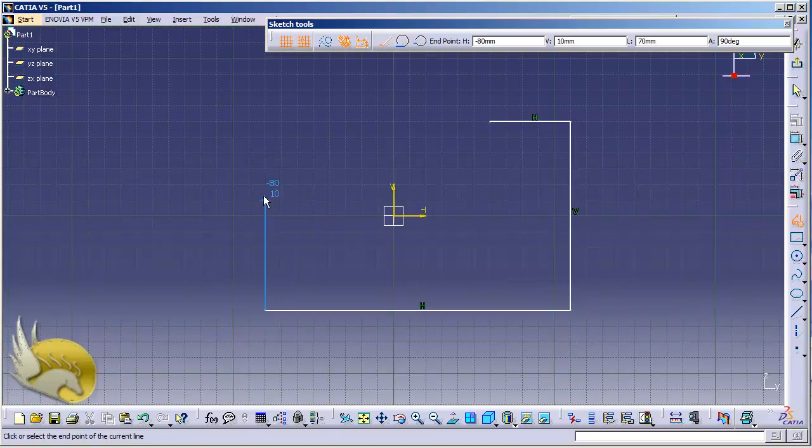I click on the sketch and go to YZ plane, and I select the profile tool to create a U-shaped profile like this. I go down to the left, to the upper, and I'm going to have an arc here. So this is the arc. I go down again to the right and now close my profile like this. So I exit my workbench and now start padding this 20 millimeters in both directions. I guess it is okay.

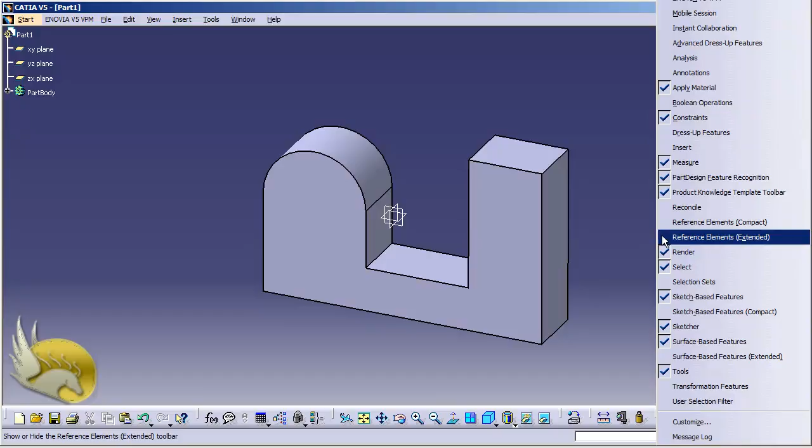So I click here and now I have this plane, this plane, this plane, and a lot of other planes that are available for me to create my sketch. So what if these planes are not enough for my purpose? What if I want another plane here? If you need to create new planes, you need to have the reference elements toolset available in the part design environment. So right click on your toolbar and make sure reference elements extended is selected. So I select this and you can see this here.

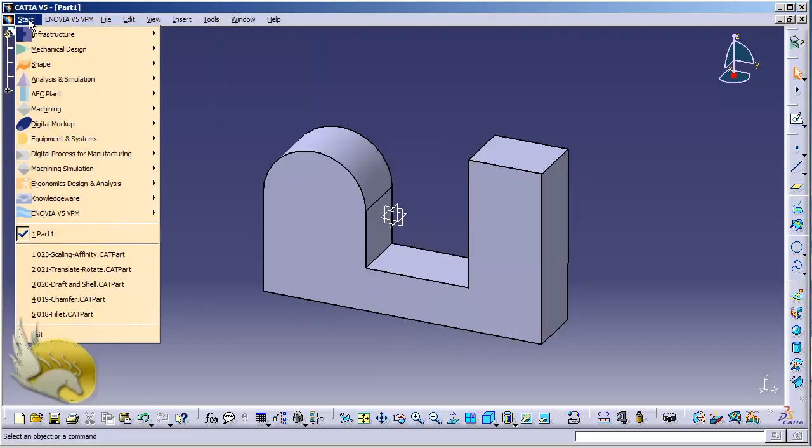If you want to go to the insert menu and add reference elements, you need to be in start, mechanical design, wireframe and surface design. So if you click here, you take your part to this environment, and now you can add from the wireframe planes menu a new plane to your shape. But I'm going to be in the part design environment. That's okay for my purpose because most of the tools that I need are available here, and reference elements is too.

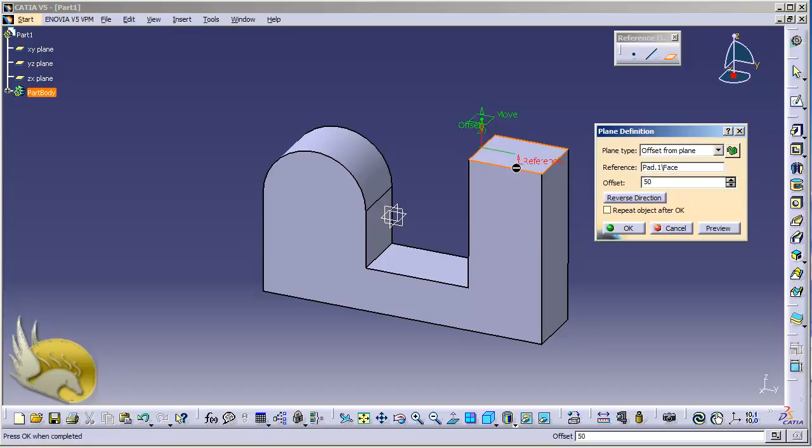So I click on plane, and the simplest and easiest type of plane to create is the offset from plane type. So I select this reference and I tell it to create a plane 50 millimeters above this face. So I type in 50 and click OK, and I can see this plane is here. So whenever I want to use this plane, I can go and select this plane from here, or I can go to part body and see the plane here, click it, go to sketch, and now create a simple shape.

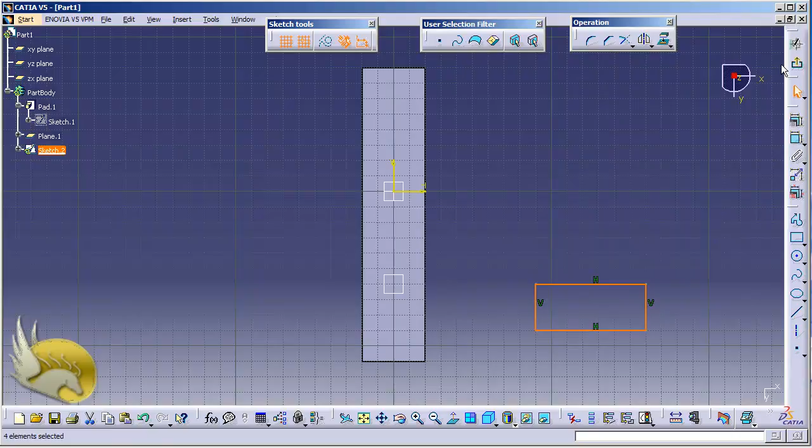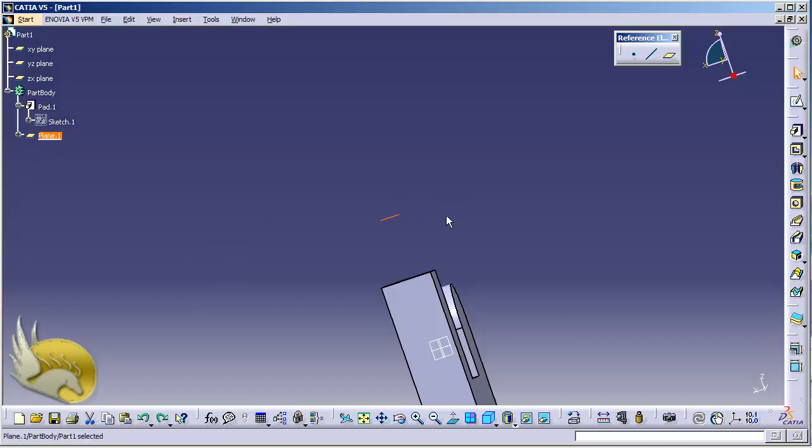I click here and I draw a rectangle, for example, here, and I exit my workbench. Now you can see that this is created for me. I can use padding, for example, in reverse direction, and I click OK. Now you can see that I have created this. This is not in any of the predefined planes, but it is in the plane that I have created right now. So let's press Ctrl Z several times to get rid of this, and now I'm going to click on this isometric view so that I'm aligned to this.

So I'm going to hide this plane. I don't want to see it again. I right click and click on hide/show. Now I go and click the plane and select another type of plane. One of them is parallel through point. So I need to have a point here. If I want to create it, I need to select a face as my reference, and of course I need to have a point. Because I don't have a point, I can right click here and select create point and create a point right here by coordinates, or I can go to the sketch area and create a point.

For example, if I cancel them out, I can select this face as my plane and go to sketch and select the point tool from the profile toolset. This is the point that I'm going to select, and this is going to be constrained so that it is at an exact coordinate. So I exit my workbench, and now this is the point that I'm going to select. So I click on reference, and now select parallel through point.

First of all, I need to select the reference surface. This is the reference, and you can see that this point is selected for you, and the plane is selected and created for you. So this is the second plane. I'm going to hide this again.

And now the third type of plane is the plane that is at an angle or normal to a plane. So I need to have a plane and select an angle for that. So the rotation axis can be, for example, this line. So I click this line, and this is the rotation axis, as the name says. So the reference is this face, and now you can see that this is created at 0 degrees to this face, and it goes through the line. And I'm going to make this about 45 degrees.

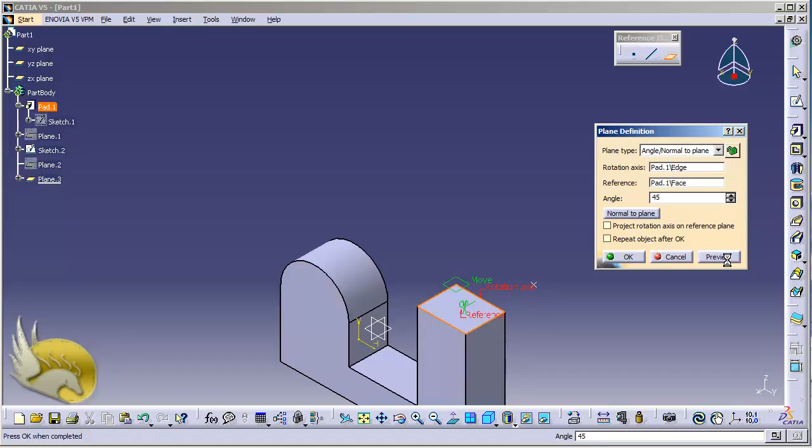So I click preview to see the results. You can see this is what I have in my mind. So this is the plane that I created right here.

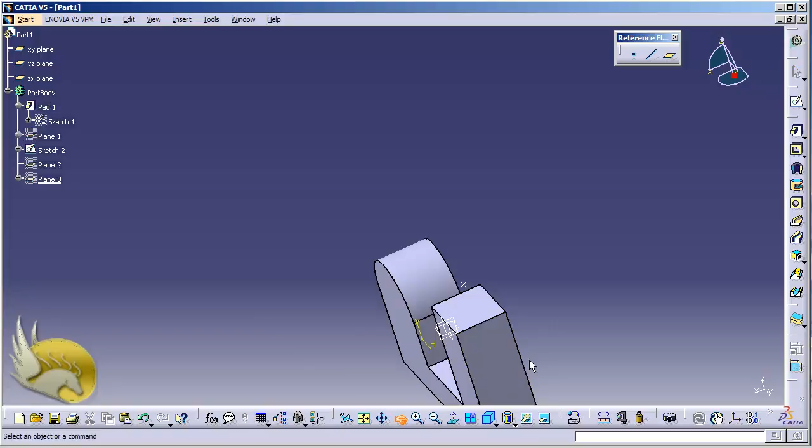Now I hide this plane again to create another type of plane that goes through 3 points. So I need to have 3 different points for my purpose. So let's cancel this out and create another point. For this, I'm going to rotate a little bit, select this face, go to the sketch area and create a point, for example, here. And of course, you should have some constraint to put the point in the correct place.

So I exit my workbench, and now I have to select through 3 points. The first point is going to be this. The second point is this, and of course I can select any point for my third point. For example, this is the third point that I clicked. This is the vertex of 3 lines, and now you can see the plane like this.

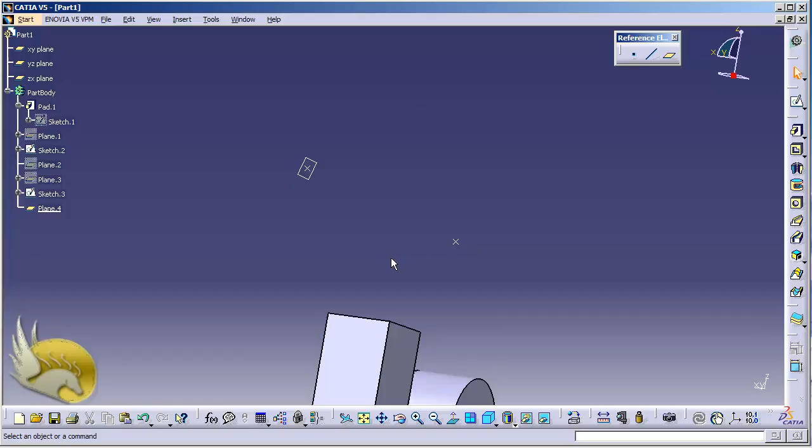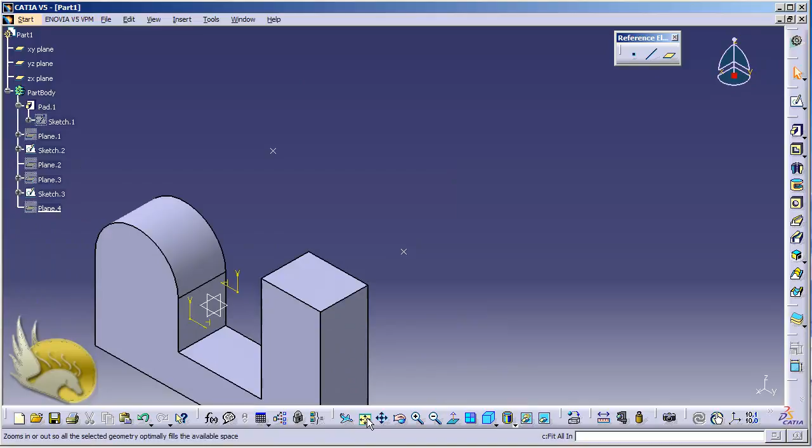So this is kind of a complex plane, and in cases where you are creating planes that are intersecting 3 different points in some very complex designs, this is a very nice and handy type of plane. So I click on this and click on hide/show, and again I'm going to select another type of plane. So let's have this in my viewpoint.

I select plane again, and now I select through 2 lines. So I need to select 2 lines here. The first line is going to be this line, I guess, and the second line is going to be this. So I have a plane that goes through these 2 lines. So I click OK, and now you can see this plane here.

Again, I hide this and select another type of plane here, and that's the plane that goes through point and line. So this is very easy. First of all, we select this point, for example, and second, you select a line. Whatever line you choose, it will create a plane that goes through these two. For example, this line yields such a plane.

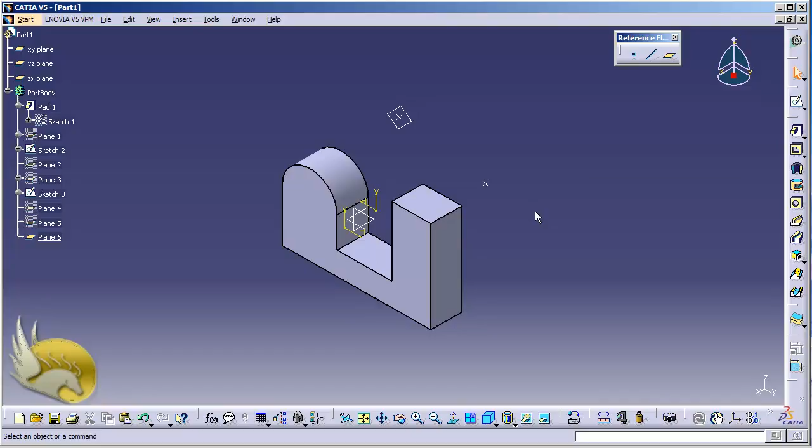If I click on the line and select another line, such as this or this, you will have another type of plane. So I need to have, for example, this line. So I have this plane, and let's see what it looks like. This is kind of an inclined plane that I have created right here. So I right click and hide this again. I don't want to see this. So let's go to another type of plane.

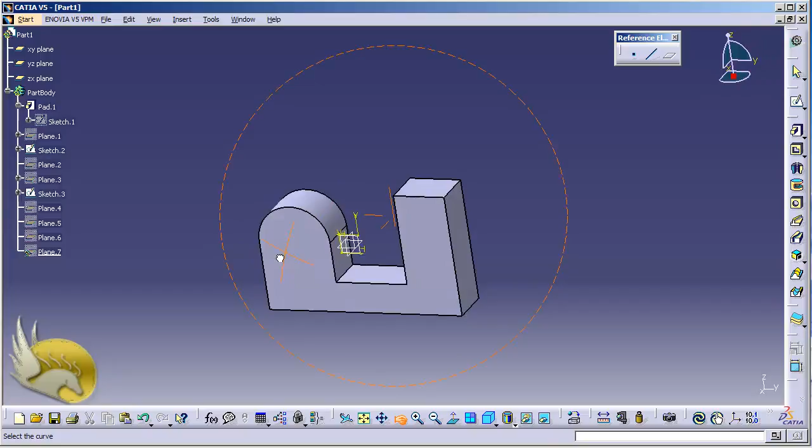This is going to be through planar curve. For this, you need to select a curve. I have a face, and selecting the curve is not different from selecting that face because I already have the plane, but I'm going to show you how this looks. If I select this curve, for example, I will have a planar curve like this.

Okay, or I can of course select other types of curve and select through planar curve, and you can have this type of plane like this. But here it is the same as selecting this face. So I click OK again, right click on this and click hide/show again, and I go to plane and see other types, normal to curve.

So normal to curve asks you to give it a curve like this and a point like this. So you can see that it is perpendicular to the curve at the point where the point is projected. So I click OK again. I click and hide this.

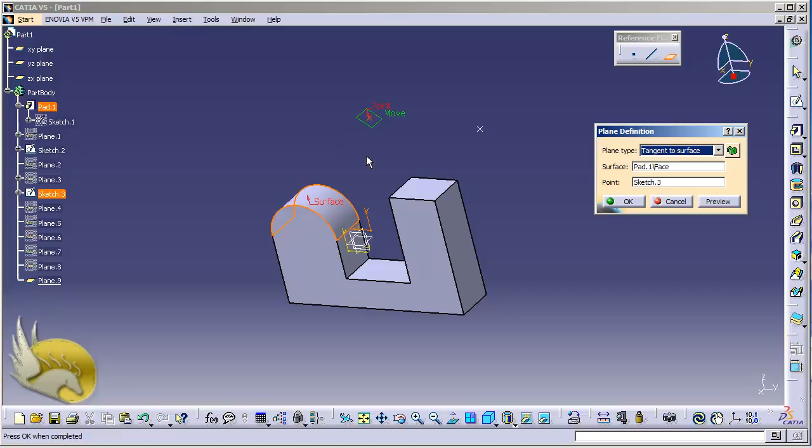Other types of plane are such as tangent to surface. For this, you need to have a surface like this, and again I need a point. So the plane is tangent to the surface. If I click OK and rotate a little bit, you can see that if I bring this plane down in a perpendicular manner to the curve, it will be tangent at the point where the first point is projected. So I right click again and hide it.

Go select other types, for example, equation and mean through points. I'm not going to talk about these right now. These are going to be somewhat advanced topics, and I'm going to talk about them later. So you know how to create different types of planes using the different options that are available here. And now I can go and create a multi-section solid.